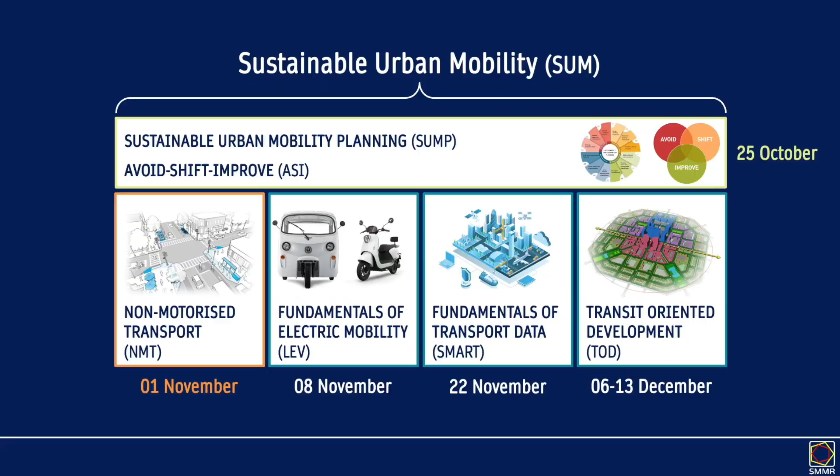On behalf of the SUM project, today we deep dive into the topic of non-motorized transport. NMT, a topic I am very passionate about. What is it? Can anyone name a kind of non-motorized transport?

Bicycle, walking, scooter, yeah. There's many clues in this picture, and it's in the name. Anything without a motor or an engine, like walking, cycling, small-wheeled transport, and that could be a skateboard, but also maybe a street vendor who has a cart that doesn't have a motor, and a wheelchair is also non-motorized, at least some types of wheelchairs.

You often see non-motorized transport referred to as active mobility or human-powered transport, but the most common is NMT and active mobility. Today we'll really focus on walking, and we'll also talk a little bit about inclusivity, which will cover wheelchair travel. We won't cover cycling in much depth, not because it's not important, but because it's another very big topic and we just won't have time. But in the future, if you're interested, we can do an extra session where we focus entirely on cycling.

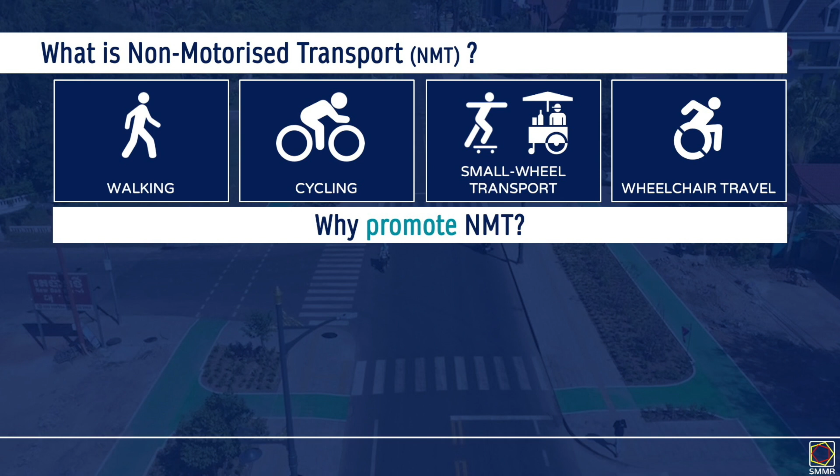Economically, if I walk to my destination instead of taking my motorbike or a tuk-tuk, I will save money. Walking is essentially free. The fuel you need is the food you eat. So there is a cost, but it's a small indirect cost.

Socially, exactly, you can meet people. It's more interactive. And if everybody is walking, then that's quite good at a societal level - there'll be stronger communities. When you walk, you don't face congestion. And again, at a larger scale, if everybody in the city is walking, you reduce the amount of people potentially driving cars, which reduces congestion, but also having a very walkable city can also increase public transport ridership.

Walking, active mobility, is great for short distances. It's not very practical for medium or long distances, but the majority of our trips are short distances. And everyone, including drivers, are pedestrians at some point in their lives or in their trip. If you own a car, you might have to walk to your car from your house, or when you arrive at your destination, you have to park your car and walk. So everyone benefits from having good walking pedestrian infrastructure, and it's also the most natural way of getting around. We are essentially born to walk, and walking is good for us, and walking is really the foundation of our transport system.

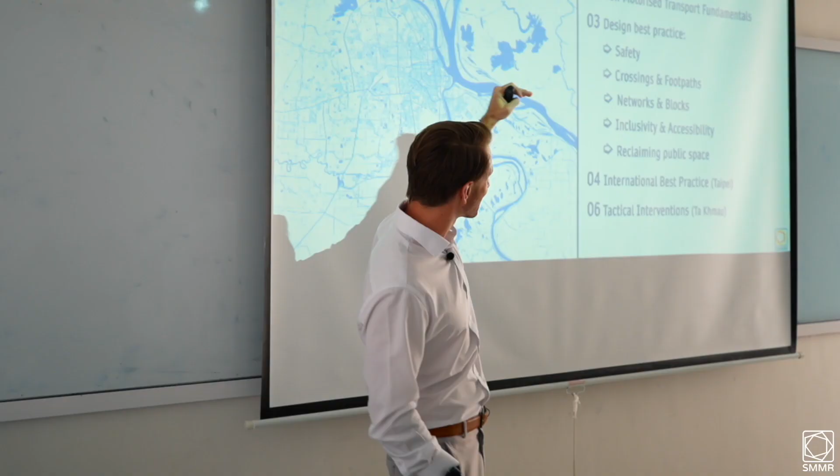Then we'll talk about the fundamentals. After that, we'll go into design best practice, and we'll cover how to make our streets safer, how to improve

our footpaths and crossings, how to create integrated networks of footpaths and crossings. Then we'll talk about inclusivity and accessibility.

Walking is something that you can probably do very comfortably, but also think of your little brother or sister. If he is 3 or 4 years old, can he walk safely?

Less likely. Or if you have a grandparent who's over 70 years old, it's also important that they can comfortably navigate the streets. Also, vulnerable users.

So people in wheelchairs, people who are blind, and there are many ways we can better design our streets for them, and not just thinking of streets as spaces for movement.

They're also public spaces, and we can create more public spaces. And I think Phnom Penh would really benefit from more public space.

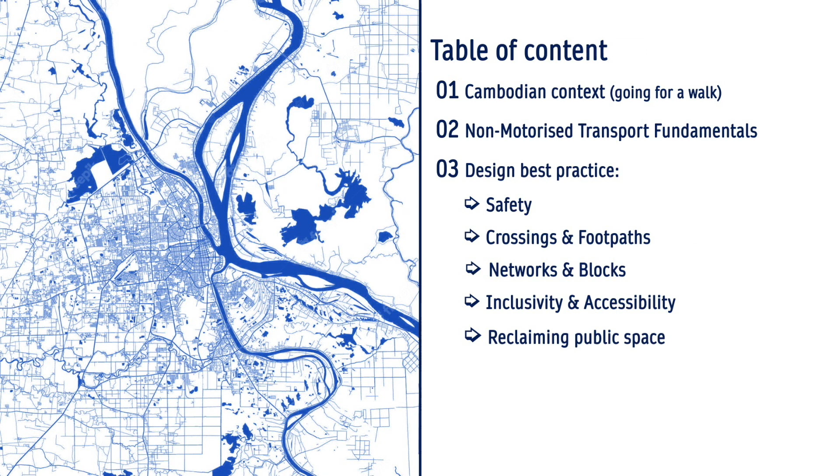Then I will talk about some international best practices. I have used Taipei, the capital of Taiwan, and I'll explain why later on.

So, Cambodian context. Yesterday morning, I went for a walk. I live around here, and I had to buy some food. So this was my walk, and I made a video.

I recorded it, and we will watch the video, and I want you to think about these different elements, and then we will score it. So it's not very scientific, but it's just to get us thinking.

Good morning everybody. I wanted to take us on a little video walk where I would document my user experience as I go from my home to Super Duper to do some grocery shopping.

It's exactly 8 a.m. on street 278. As you can see, I am walking in the middle of the road because I don't have a footpath.

Now we're going on to street 63. A lot of street life, different businesses spill out onto the road and onto the footpath, which is why I have to walk on the road next to the vehicles, which I have to say can be a little bit stressful. And that's because these businesses serve the two-wheelers.

Needless to say, every walk is exciting and interactive, but unnecessarily dangerous.

And it seems the buildings are built with wide footpaths, but these become areas for parking, and little businesses pop up on what could be somewhat continuous footpaths, and it leaves no right of way, not even 1 or 2 meters where someone can walk.

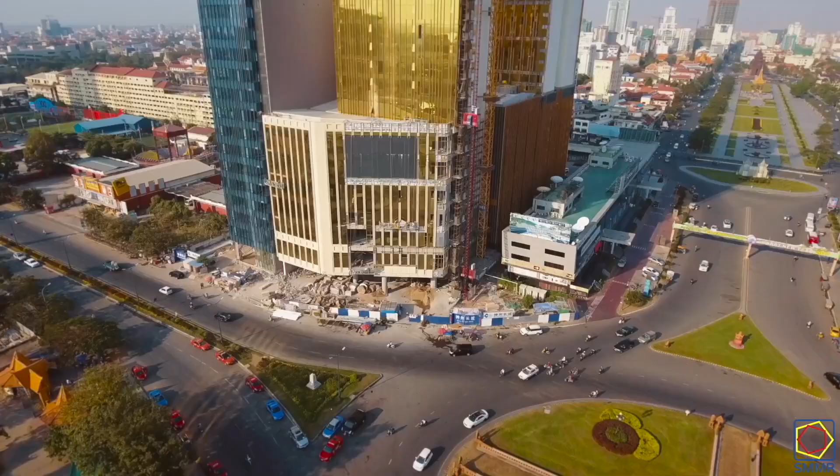of Phnom Penh, excluding a few of the more modern areas, say on Koh Pich, Diamond Island.

There, the streets have been built to different standards. There's many things we could do to improve this situation. But the first thing we need to do is understand what we are dealing with.

So, out of 5, or 0 being not safe at all, 5 being safe, how do we feel my walk was?

I will give it 1 point. Just because it didn't feel safe, but in 3 years, I've never had an accident. I feel like the vehicle flow is so obstructed in Phnom Penh that vehicles drive slow, that even though the

situation is not good, it's not super dangerous. So 1 point for safety.

How about comfort? It's true, it wasn't very comfortable, but it was possible to walk. That is something. You go to some cities in Southeast Asia, Jakarta, Bangkok, Manila, some places are impossible to walk in, but other places are quite good.

So okay, maybe 2 for comfort. Another element we have to factor is the surface I was walking on. How was that? Smooth? Not so smooth? Shade? This was in the morning, so the sun wasn't high enough, but in the daytime it gets quite hot.

There are some trees, some shade, so shade is okay. Crossings, no crossings. Inclusive - do you think this was inclusive for someone in a wheelchair? Connectivity - my ability to get from here to here and how easy that is. So it's not a really well-connected city. Parking - there is parking, but in the context of walking, parking is a big problem. It's something we really want to solve.

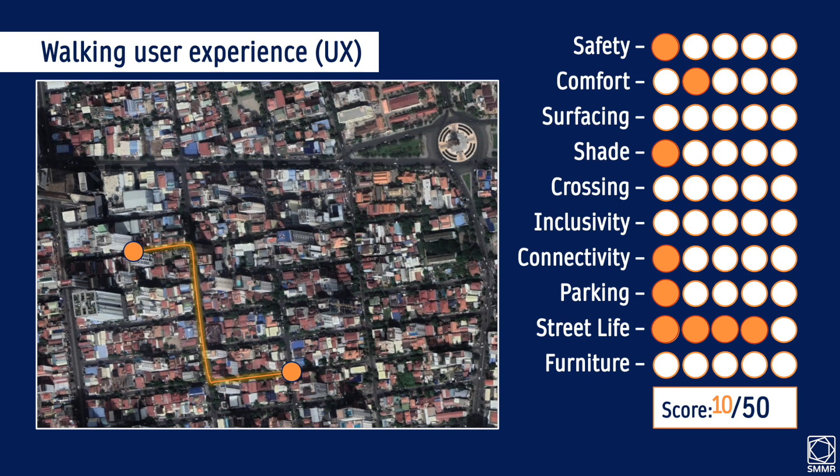And when we score it all together - I did this myself - I give it 10 out of 50. Not a very high score. But there is so much potential, and we'll explore that today, how we could potentially improve these kinds of streets and what kind of design practices we could and should explore.

The footpaths are there. They used to be well used by pedestrians in a lot of the inner city areas. A lot of this is a legacy of French urban planning. I couldn't find a year, but it's between 1940 and 1970. Most people were walking, you had some bicycles and cyclos. Cyclos were the tuk-tuk, the PassApp of the time.

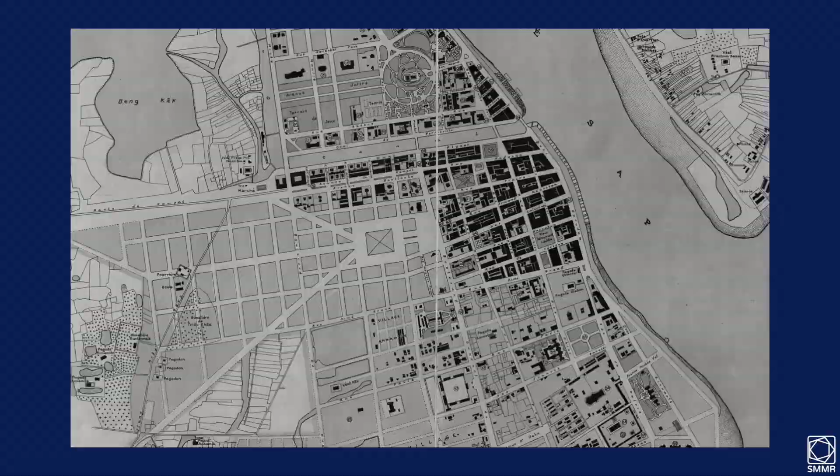The city was designed for a much smaller population, and the infrastructure was built for walking, and at the time there was no or very limited motorized transport. So Phnom Penh used to be a very sustainable city, and walking was very smooth, safe, seamless. As more and more motorbikes entered the city streets, more and more cars arrived, fewer and fewer people would walk. And so businesses had to sell to people in vehicles, and it creates a strong incentive to move your shop, move your goods right to the edge of the footpath.

And so they blocked all these footpaths that once existed because now they sell to people on motorbikes. I'm sure you do it, I do it, because of motorization, which has happened as Cambodia has grown. Last week we spoke about growth and how your job is to absorb this growth. There's been a lot of urbanization, and the urbanization has happened with motorization.

Urbanization can be healthy or unhealthy. We explored last week what that looks like, and there's many examples of healthy urbanization in Cambodian cities, but also very unhealthy. So healthy urbanization is when we limit urban expansion and we build vertically. We fit more people in a small amount of space. That's more sustainable, and that's densification.

The opposite is sprawl, where we build low-density settlements which create more private car trips. Densification is good, but it has happened in a very uncontrolled fashion. And now there's an old urban plan built for I don't know how many thousands of people, but today it's the same urban plan with much taller buildings, way more vehicles, way more people, way more shops, and it's all happening in the same amount of space. And it's created quite a chaotic streetscape.

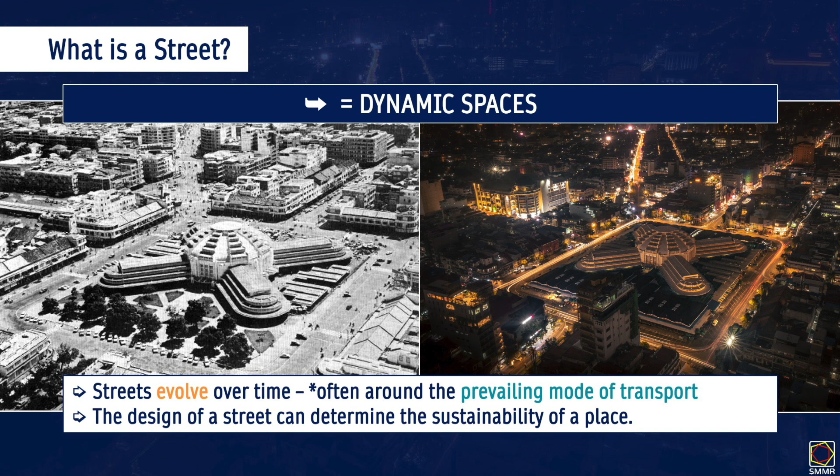And streets are also dynamic. You can see how Central Market has changed in the last 100 or maybe 70 years. There's been a lot of urban development, a lot of densification. Here we have Sorya Mall. There used to be very wide, unobstructed footpaths. Now they're mostly used by shops and for parking. There was trees. The market was expanded. The street space is dynamic. It changes over time. They often change around the prevailing mode of transport. So back then, you didn't need as much parking for vehicles, and that's what changed in 70 years.

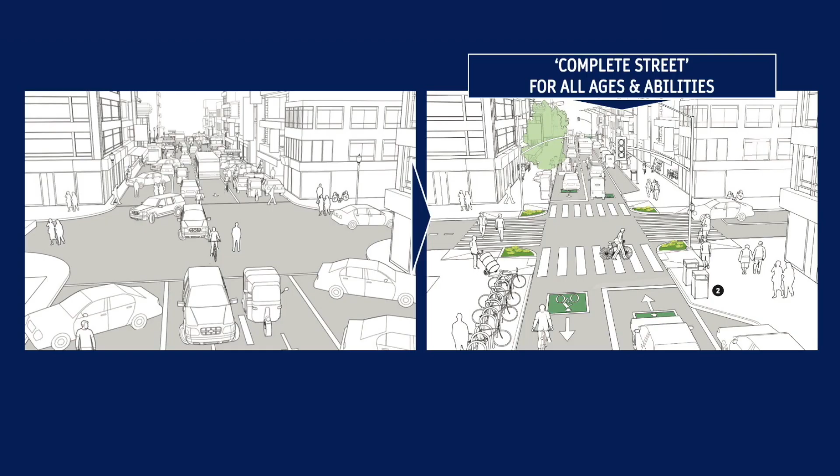This is what many of the streets look like today, and it's not optimized because it's not organized. Whereas a complete street is a street that is much more organized and is designed around all the different uses. Well, look at what we can see here. The roadway here is narrower. There are parking bays, there's green infrastructure, so we see a tree here. The pedestrians have at-grade crossings, yeah. There's small ramps, so it's level. And there's bins, and there's many different features. And that's a complete street.

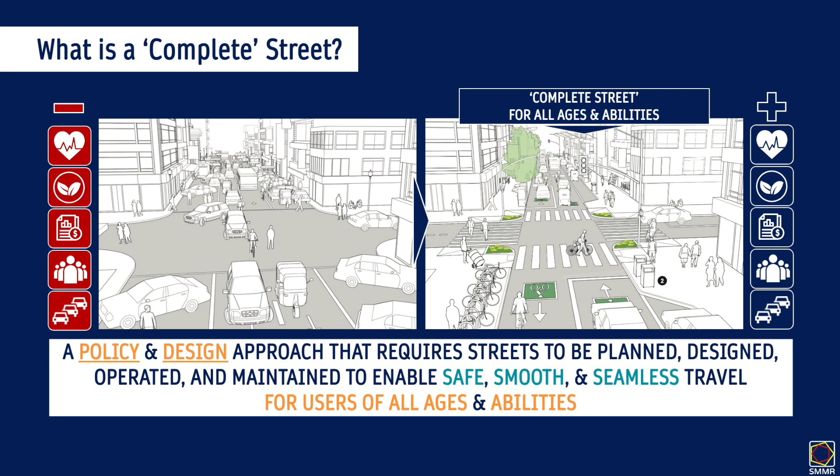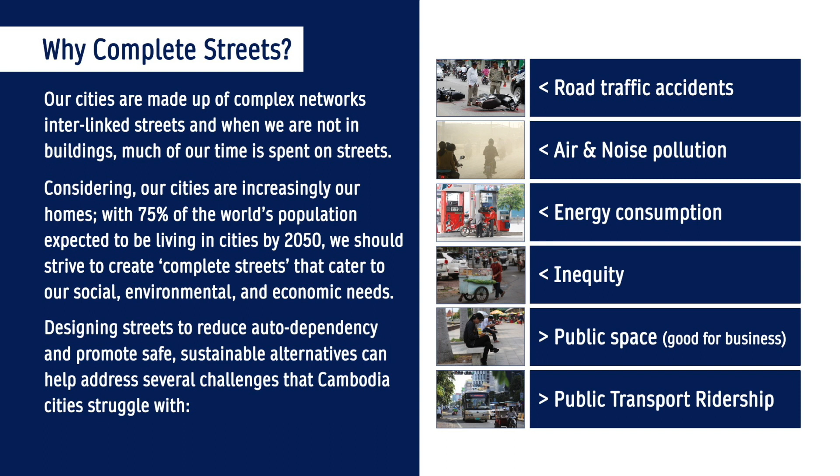And we will really look at all the different elements of a complete street. A complete street is essentially a policy and a design approach that requires streets to be planned, designed, operated, and maintained to enable smooth, safe, and seamless travel for users of all ages and abilities. And if we can create complete streets, we can reduce road traffic accidents, reduce air pollution, reduce energy consumption, reduce inequity, and increase inclusivity. We can increase public space, and we can also increase public transport ridership. So these are all things I think we can all agree are worth striving towards.

But now what we need is to know some street design best practices to make these nice thoughts a reality. We can design our streets to increase safety, and we'll look at how we can do that.

And we'll also look at how we can design footpaths and crossings to improve the non-motorized transport environment. We'll look at networks of footpaths and crossings and how that can enhance overall non-motorized transport mobility, then accessibility and public space. So first things first, safety. Safety is obviously a very relevant topic, unfortunately.

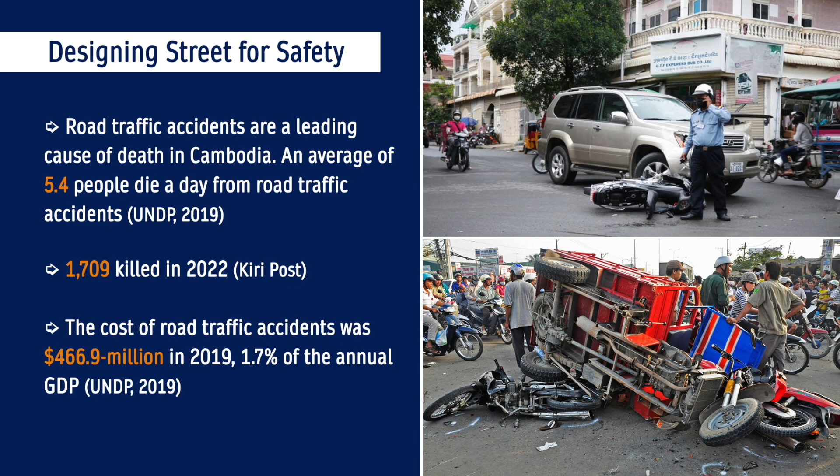In 2019, 5.4 people died a day in Cambodia in road traffic accidents. I suspect it's more now. What's most tragic is it can happen to anyone at any time, and it is completely avoidable through better driving behaviors, but design and street design can really enhance safety. And besides accidents being tragic, they're also very expensive. You can lose some valuable, young, economically productive people from road traffic accidents. The cost of road traffic accidents in 2019 was $467 million.

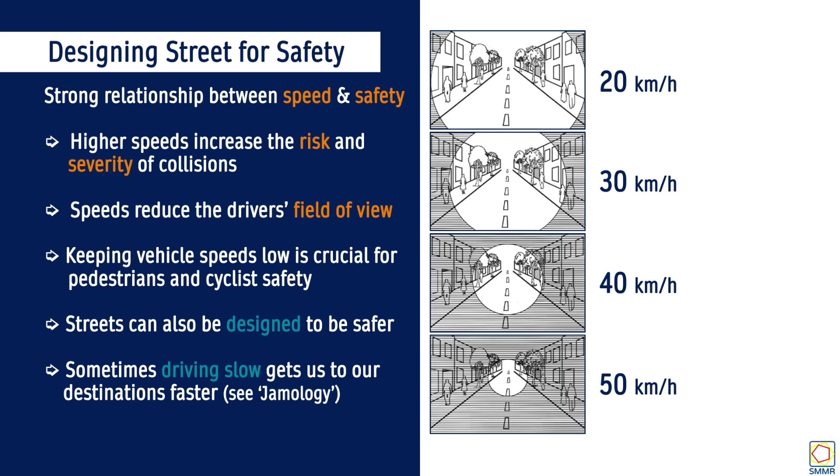And if we want to improve safety, we need to understand the relationship between speed, driving speed, and safety. The higher you drive, the more likely you are to have an accident, and the more likely that accident is going to be severe. And that's because when you go fast, you reduce your field of view. So if you drive slowly, you can process a lot more information about your surroundings. And as you go faster, you can see less and less. It becomes blurry. So if I'm driving down the street at 50 kilometers an hour, it could be something as simple as a street dog runs out. I might not see it, or I might not be able to slow down in time, and that can cause an accident.

Or if you're to hit someone, speed also is a big factor. So if you're driving 80 kilometers an hour, the risk of death is essentially 100%. 50 kilometers an hour, roughly 50%. And as you go slower and slower, the risk of pedestrian death goes down considerably. And that's in part because the faster you go, the longer it takes you to stop. So you see less, and it takes you longer to stop. And so we can have a lot of road traffic fatalities caused just by speed. And I'm suggesting that we drive slower.

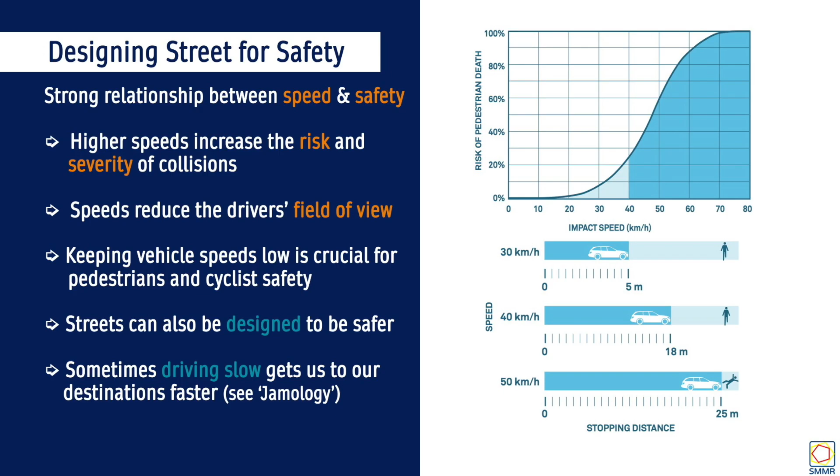And many people might think, well, I don't want to drive slower. It takes me longer to get to my destination. But if everybody is driving slower, we slow down the average speed. It can, in some instances, reduce your average journey time, because congestion is often caused by vehicles coming together. Once you stop the flow, you create waves of congestion, and it slows down movement through the network. And so sometimes driving slow can get you to your location faster. It's counterintuitive. If you're interested in that, there's a concept called Jamology that explains why driving slower is faster.

So how can we improve safety? Through design, we have different options. This general topic is referred to as traffic calming. And it's essentially calming down traffic using different street design configurations. And there's many different options. I'll give you a few examples. So one obvious one is narrowing the lane. The wider the road, the faster people tend to drive. You make it more narrow, they will drive slower. And if you narrow your lanes, you can free up space for other activities.

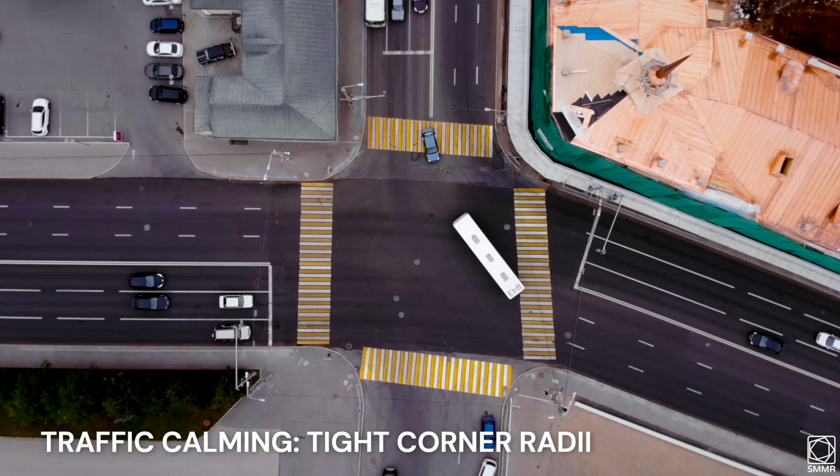That's one option. Then when it comes to intersections, the speed at which vehicles turn depends on the radius at which they can turn. And if you want to slow down a vehicle, you can create a more narrow radius. So here you can see most intersections are 3 to 5 meters, the radius, which allows you to corner reasonably fast. Some in Phnom Penh are more than 5 meters, so you can really take the corner at a very high speed, which is quite dangerous. If you really want to slow down traffic, you should opt for around 1.5 meters. So you drive towards the intersection, you really slow down, you take your turn, and then you speed up.

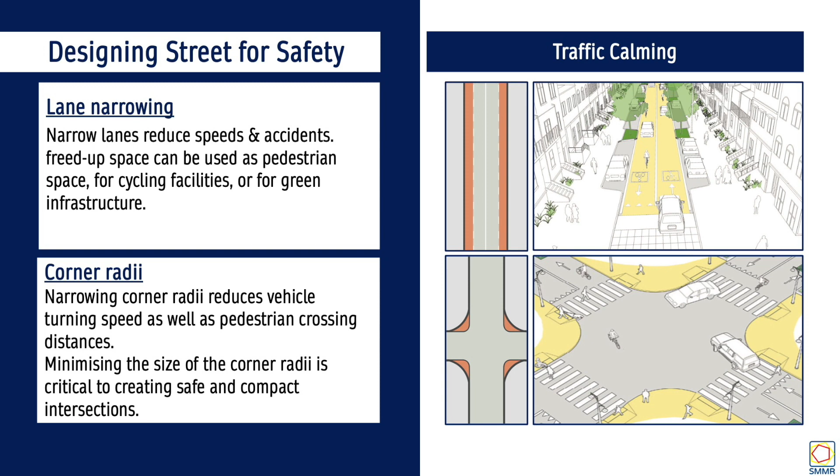That really increases safety, and it's good because if you narrow the radius, you also make the pedestrian crossing distance shorter. So cars drive slower, people walk less far, they're at less risk when they cross the street. And something as simple as that can go a long way in making your streets safer. Here's an example. This is in Addis Ababa in Ethiopia. A vehicle turning here can go very fast, and this person is quite vulnerable.

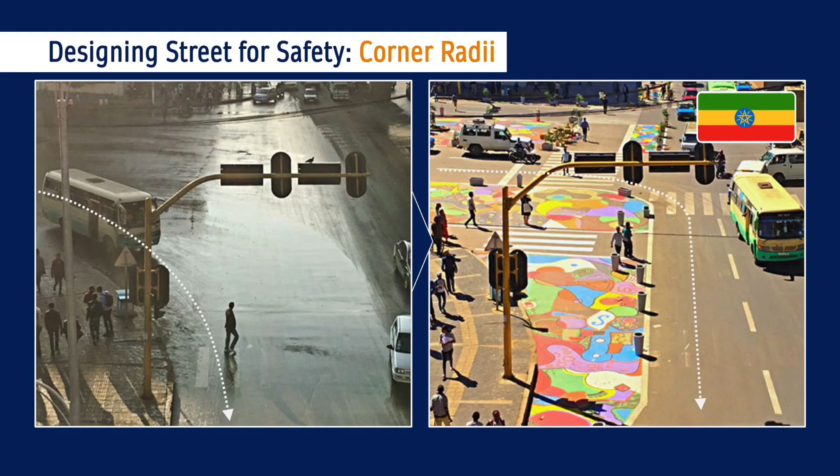So we saw that as a big problem, and using paint and plants, and we'll explore what exactly is going on here later on, using those, we made it much more narrow and slowed down the vehicle speeds and reduced this crossing distance. Another option, not at the intersection where roads meet, this is the mid-block, in the middle of a block. There's also ways you can slow down vehicles.

This is a pinch point where basically for a small segment, we create a narrower roadway. A car approaching this way or then that way will have to slow down, and it's also a good location to put in a crossing. So that's another option.

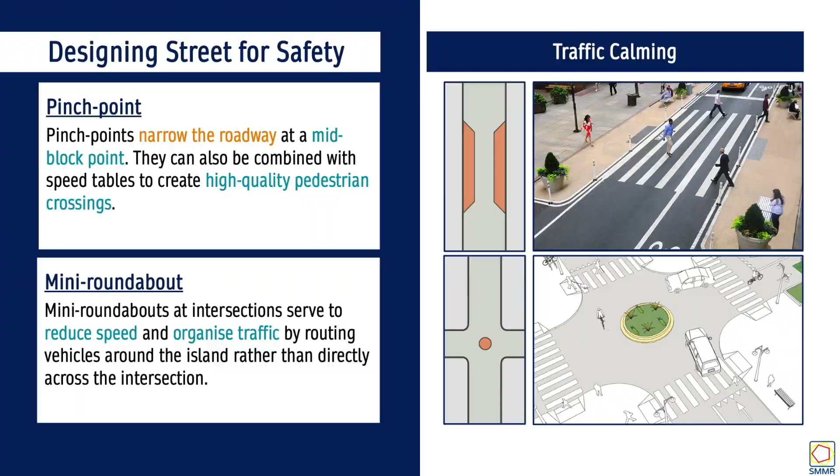We can also look at mini roundabouts. They essentially force vehicles to slow down a little bit as they enter the intersection. Instead of driving straight through the intersection very fast, you force vehicles to slow down a little bit. That can increase pedestrian safety.

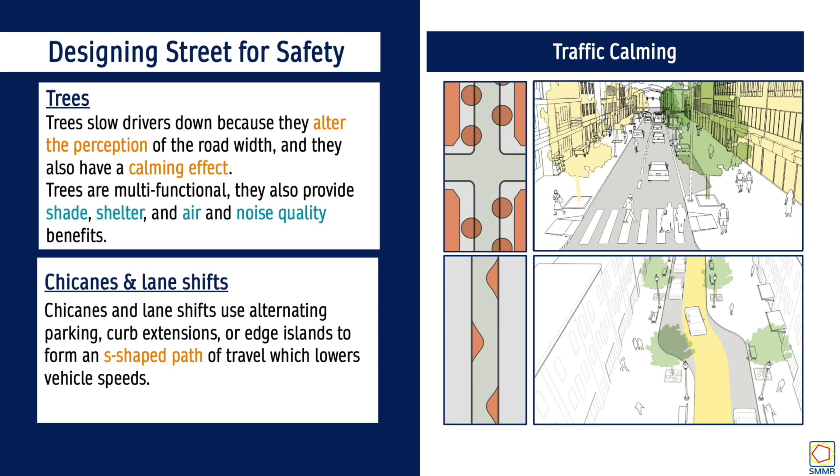Other traffic calming methods, some are less obvious. Planting trees. They alter our perception. We feel like we're in a more confined space, and we're more inclined to drive slower when we're surrounded by trees. Trees are also very calming, and trees are also good because they provide shelter, shade, and they can improve air and noise quality. This is a street in Hanoi in Vietnam. I can imagine myself driving a little bit slower down this street because of the trees.

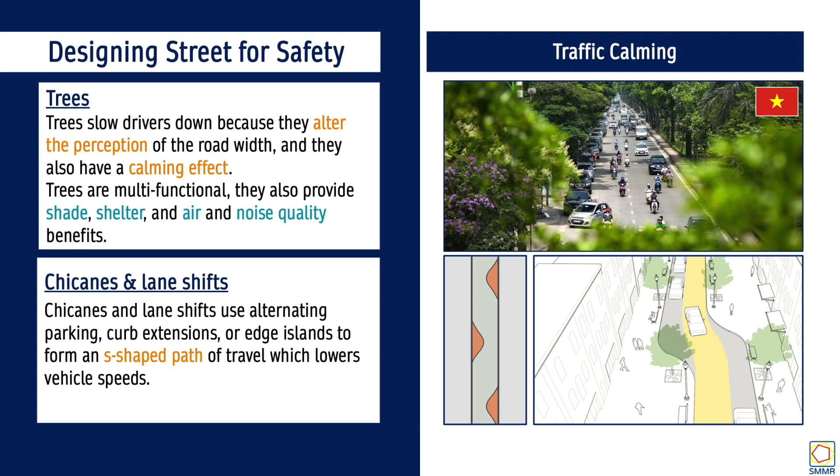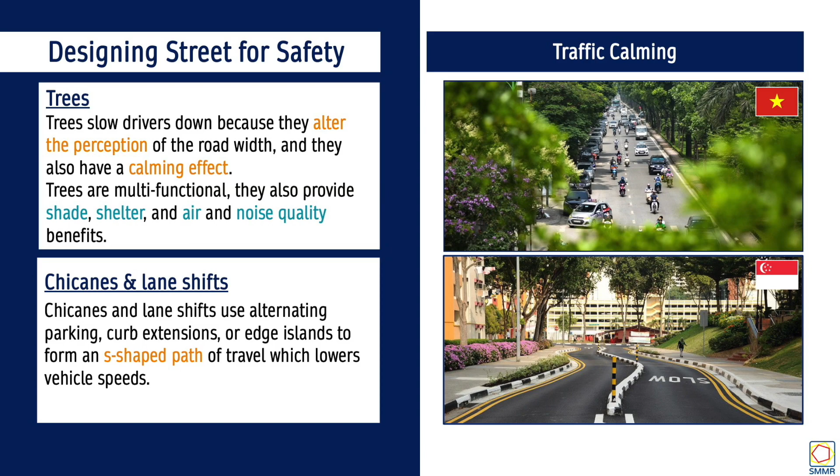Then another option, this one's a bit more unusual, is to have chicanes, basically creating S-shaped paths to force vehicles to slow down. And there's examples of this in Singapore. So that's another way to calm traffic.

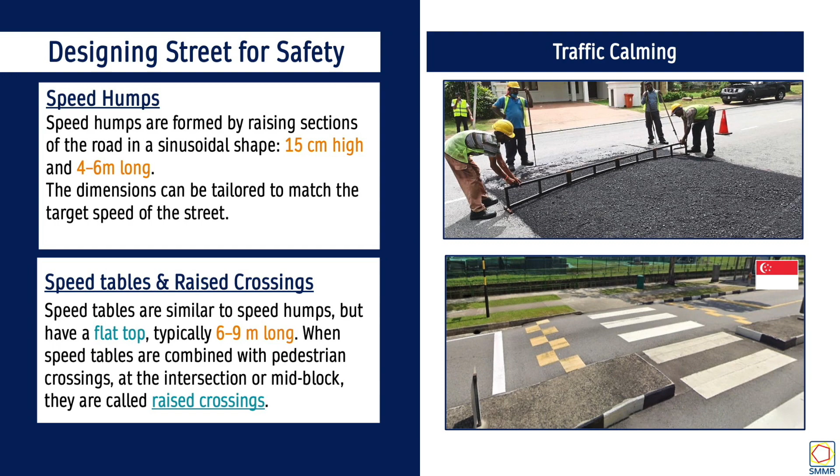So this is kind of a pinch point with a raised crossing, and you slow down vehicles, you make crossing safer. And another example from Singapore, you can see a lot of good things going on, and we'll revisit that later. So that's safety. A big component of good non-motorized transport depends on managing traffic.

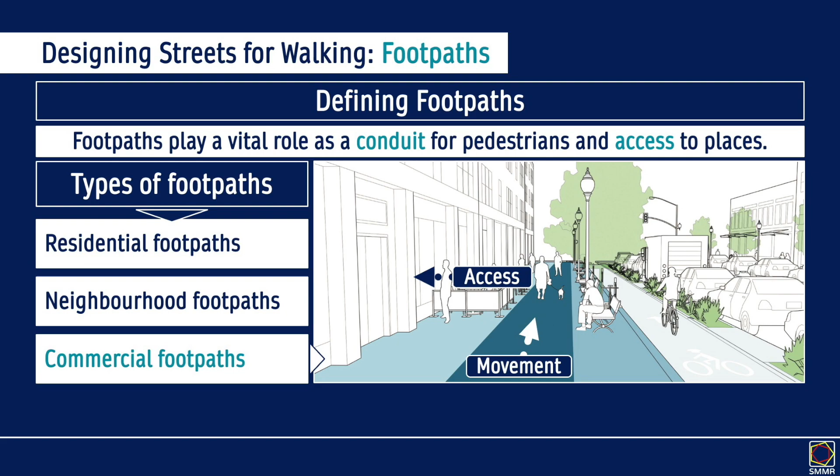And next, what we need is good footpaths. Footpaths, we know what they are just from living in cities. They are part of the streetscape next to the building edge, and they play a very important role for the movement of people, but also access to the buildings. And there's different types of footpaths. Residential areas have different needs. In neighborhoods, you have also different needs, and commercial streets like this one also have different design needs.

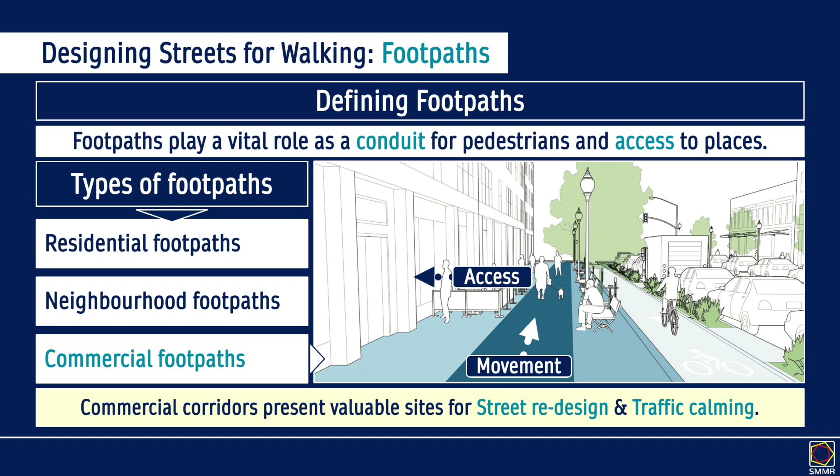And we will focus more on commercial footpaths. I think they're most interesting and relevant. And they're also spaces where there's the greatest opportunity for redesign and traffic calming. So footpaths can be broken down into different zones. And you can see them highlighted here in the different colors. You have the frontage zone. So this is the building edge here.

And this is the zone immediately in front of the building. So it could be immediately in front of the shop. Shops often have posters or plants, and that would exist in the frontage zone. Here we have some kind of restaurant or coffee shop, and it occupies part of the frontage zone. So this is not where people move. And in the Phnom Penh configuration, the frontage zone seems to be the entire footpath at the moment. So it'd be nice if we can reclaim some of that space.

The next zone is, in this case, the pedestrian zone. This is, or should be, an unobstructed path. Pedestrians should always have a right-of-way that is continuous. And so that's the pedestrian zone. In a residential street, it should be at least 1.8 meters. In a commercial area, it could be more. Really depends on the volume, but anything beyond 2.4 meters.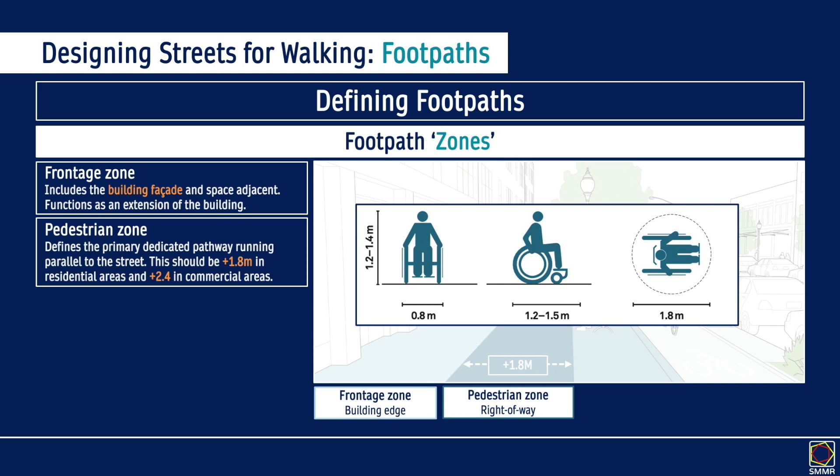And the reason in part is for accessible mobility. Say you want your pedestrian right-of-way to be wide enough for 2 wheelchairs to go past each other, or 1 wheelchair to be able to comfortably turn around. And so you need to maintain a clear right-of-way of 1.8 onwards.

Then you can have a furniture zone. In a busy commercial street, people will maybe want to sit. So you should provide benches. Some benches should be in the sun, some should be in the shade. Sometimes first thing in the morning, you want to sit and enjoy some sunshine. And so you should have a mix.

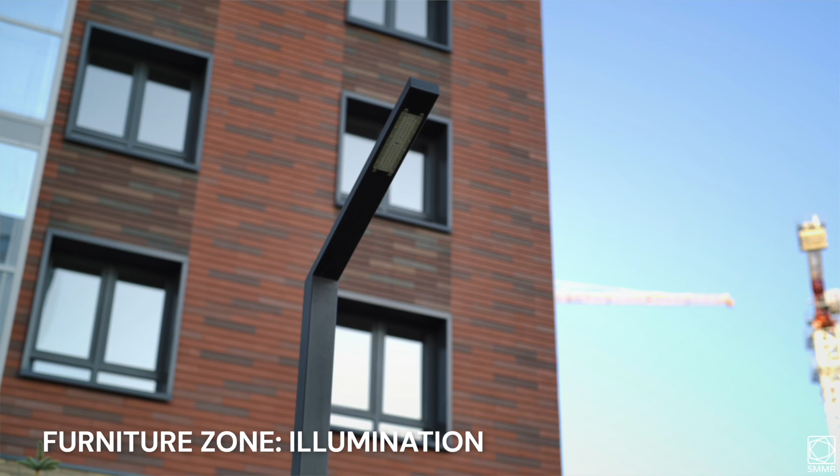You also need lights. Lights, they improve safety. At nighttime, a well-illuminated street has less crime, generally. But also, if you include more lights, there will be more people. If there are more people, there's more potential business with the shops. And so by providing good illumination, you can extend the hours of business, and good business is good for the economy. So that happens in the furniture zone.

Here you can also have bins. You could have your utilities. You often need telecommunication boxes or access to the drainage pipes.

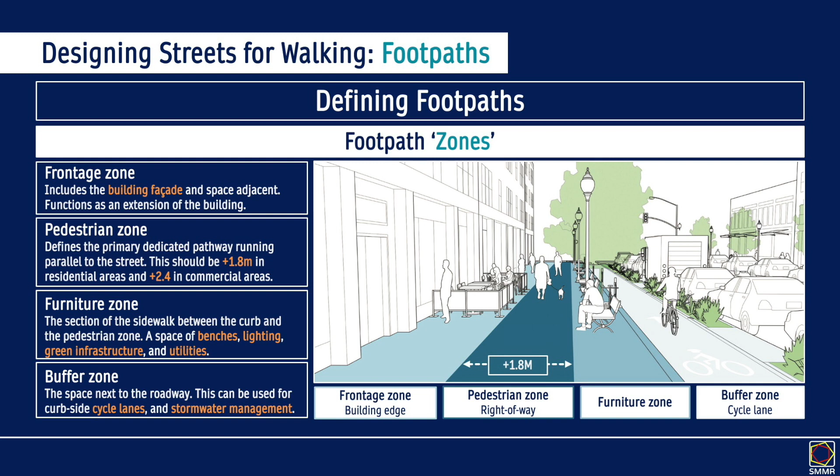So this could be located somewhere in the furniture zone. And then you have a buffer zone, so the space next to the curb. In this case, we have enough space for a bicycle path, so there's a bicycle path here. There's also some green infrastructure. This can be good for absorbing rainwater, for example, and separating people from the roadway.

And there's also different elements. So here we have one element that's active frontages. We should, in a commercial street, design the ground floors to be attractive, and that's a good thing. If you have shops with nice windows showing their products, it creates a nicer streetscape, and if it's nicer, there will be more people, there will be more business. Again, lighting is good, prolongs business hours.

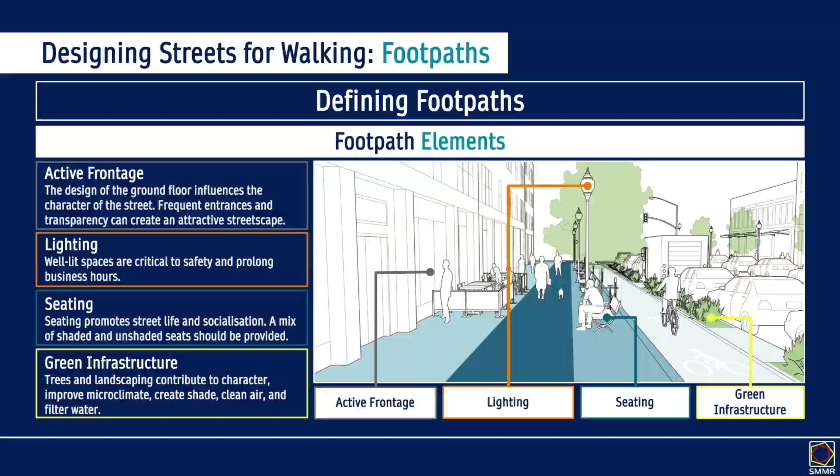Seating in the street furniture zone, and also green infrastructure, which could be in the form of trees that creates shade. It can absorb rainwater, it cleans the air, and has many different benefits. And when we're also considering planting trees, you can give thought to different types of trees. Generally, palm trees are not good for providing shade, so avoid palm trees if your objective is shade, while you have different types of trees that can provide much better shade or protection from the wind and the rain.

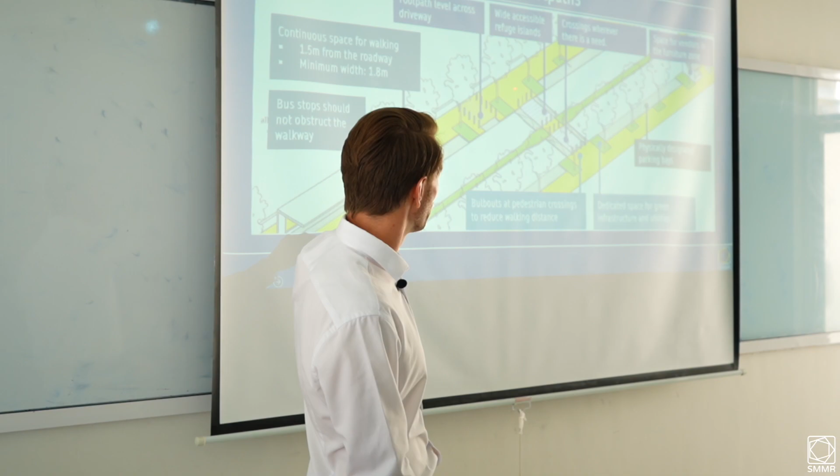In the middle here, we'll revisit this. There's also a refuge island. If there's many cars driving, sometimes you don't want to cross from here to there in one go, and it's good to take a break here. So when it's clear, you walk here, you wait until it's clear here, then you cross again. That's called a refuge island, where you take refuge, you find safety.

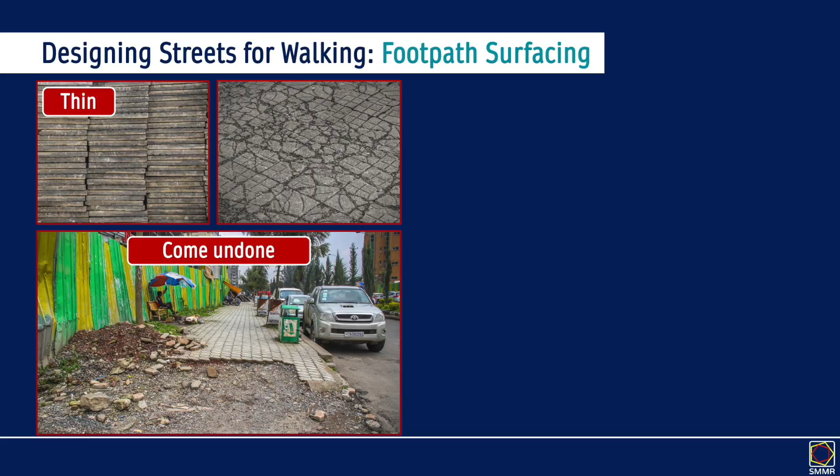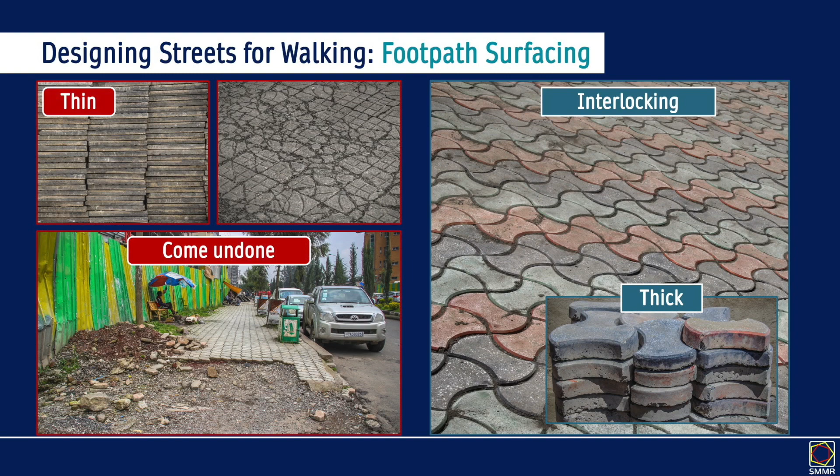Another element of a footpath is the surfacing. This was in Ethiopia. They used very thin pavings, and thin pavings are cheaper, but they break. So after 2 or 3 years, these were very prone to break. Then they switched to smaller paving stones that were thicker, but they didn't hold well together. And this was in 2017. If they didn't fix it, I'm sure the street is maybe up to here now. So a better option is to use thick blocks, pavings, and have them interlocking. So these are just small things to think about to provide a smooth surface for different non-motorized modes of transport.

So those are footpaths. Next up, we have crossings. So when you're not on the footpath, chances are you're crossing a street when you enter mixed traffic, and for that, you need pedestrian crossings. You should provide pedestrian crossings wherever there is a need, a concentrated need for people to cross. So generally at intersections, or at all intersections, you should have a crossing. Sometimes you should have a mid-block crossing if there is a demand. And there's often demands around bus stops. So if there was a bus stop here, good to have a crossing here.

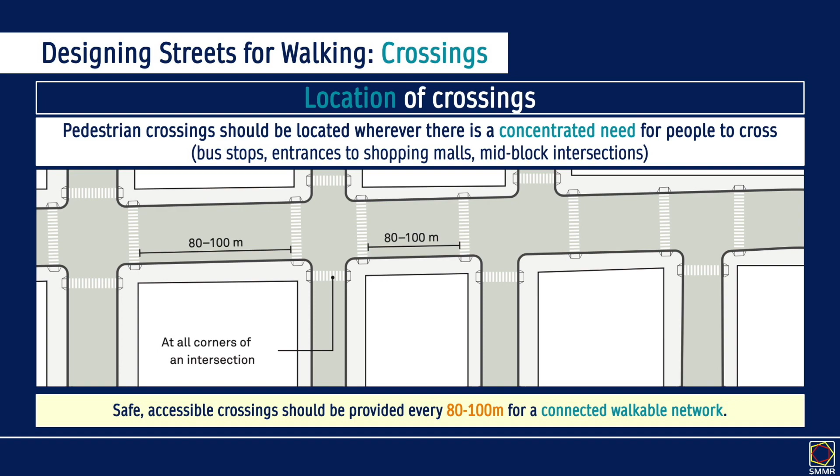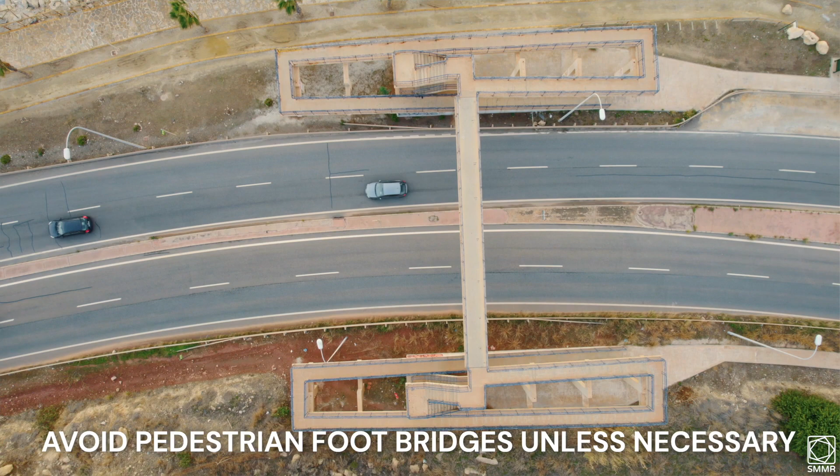There's some green infrastructure. So that's elements of a good crossing. What we often look to as a solution in emerging cities is these pedestrian elevated walkways. I'm not a big fan. Phnom Penh is building lots and lots of them. Have you seen them? I'm sure you've seen them. Have you used them? Some people do, but a lot of people, they still just cross and climb over this.

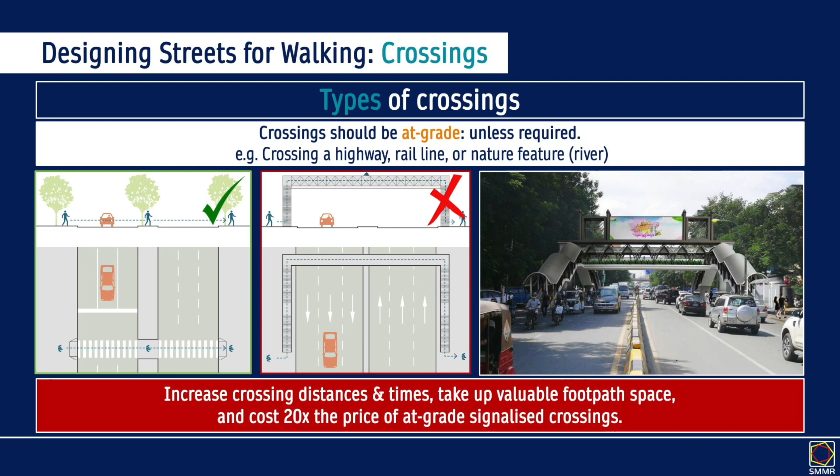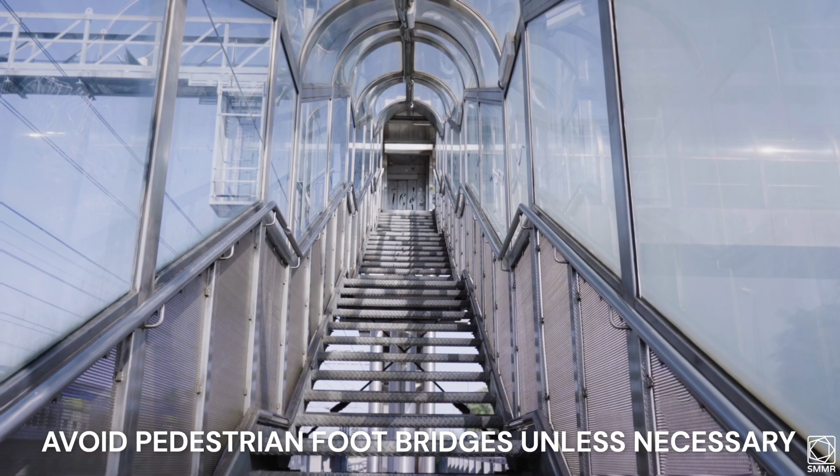It's just a really expensive solution that people often don't end up using because it's quite a journey to go over them. You have to climb upstairs, walk across, climb down, and oftentimes, even me, I just choose to cross anywhere and climb over the median, the barrier here. From an engineering point of view, yes, it's kind of a solution, but in reality, a lot of people just don't use them. It might just be better to create a proper crossing and find better ways to manage traffic and maintain traffic flow.

Another type of crossing at an intersection, we have conventional crossings. This is a very standard crossing. Here we have an example. Your crossing should align with your pedestrian right-of-way. It's at grade, which means it's at level with the road. There's a small ramp here, and you can see those here. So it's accessible by wheelchair. So this is a good conventional intersection.

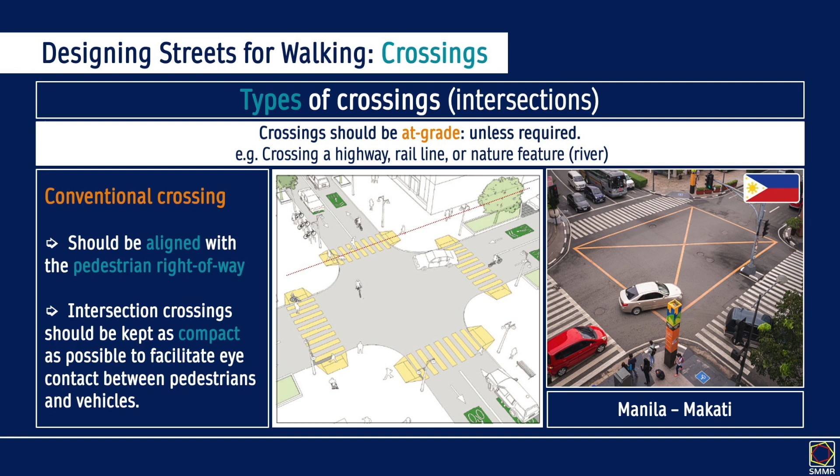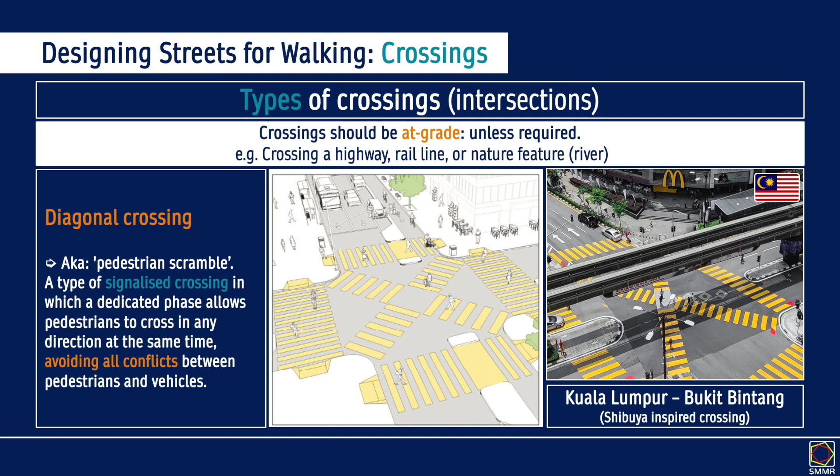This is more elaborate. This is a diagonal crossing, sometimes known as a pedestrian scramble. Here we have an example in Kuala Lumpur, and it's inspired by Shibuya. I don't know if you've ever heard of Shibuya in Tokyo. It's basically a crossing that you could introduce if there's very high pedestrian volumes. So here, there's McDonald's, there's a shopping street, there's a market, there's restaurants here, very busy area. And the way this crossing works is you have a phase where no vehicles are here. All the lights are red and all the pedestrians just spill into this space. It's quite fascinating to watch.

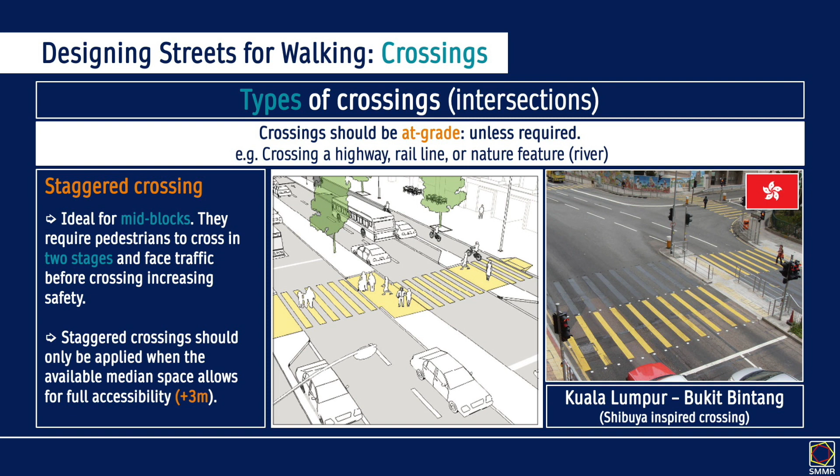At mid-blocks, so not at intersections, here's another option. This is a staggered crossing. Staggered means it's off alignment. Basically, it forces you to cross in 2 stages. You walk from here, stage 1, you arrive here on the refuge island. You have to turn, and when you turn, you face traffic. So you see vehicles coming towards you, and then you can do your second stage. So it's a safe way to cross a busy street. So this is in Hong Kong. This is an intersection, which is quite unusual, but you can really see how you would cross this in 2 stages, and they've included barriers to sort of guide you.

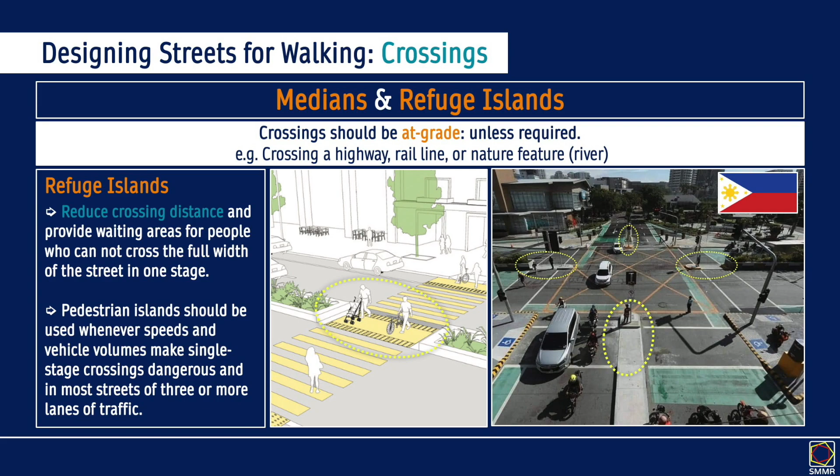And we mentioned refuge islands. Again, these are great because you can cross in several stages. Any street that has 3 or more lanes on either side should have a refuge island. These refuge islands can be designed with different features. This one is protected by this curb with vegetation. You could also have bollards, so metal poles essentially, to provide a bit more protection. This is similar. This is a tip at the median that's protruding, so it provides you with a safer space when you're here. And again, a very similar example where they've basically cut through the median to create a crossing.

And so we looked at footpaths and crossings. Now we need to think about how we can link everything together at a larger scale. When we want to create cities that promote non-motorized mobility, we need to create interconnected networks of footpaths and crossings at quite a large scale. So we have to look at networks and blocks. And when I say blocks, a block is the space within the street pattern of a city that is subdivided into land lots for buildings.

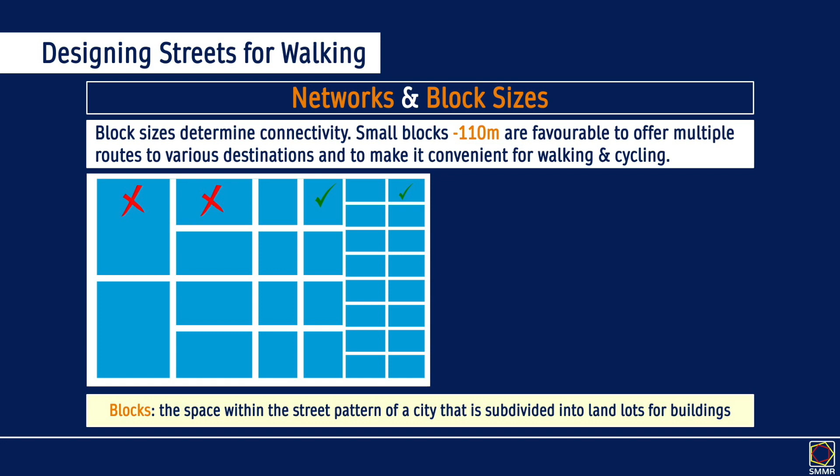In Phnom Penh, you have blocks of different sizes. You have larger blocks, smaller blocks, and if you want to create a well interconnected network of roads, be it for walking, even motorbikes, the smaller the block, the better. But obviously by motorbike, you move faster, so a bigger block is less of an issue. But if you're walking, around 110 meters is favorable. So if this is 110 meters and I want to go here, I can take lots of different routes, which is good.

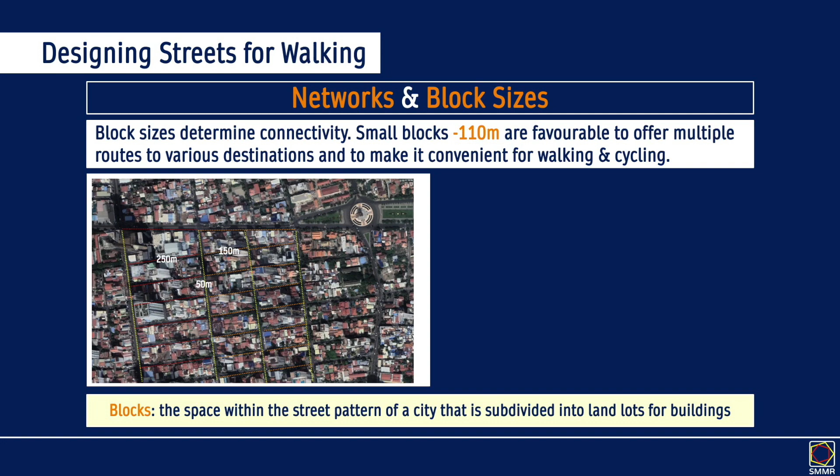When we look at it in the context of Phnom Penh, so again, my morning walk was from here to there, and the blocks here are 250 meters. So it's quite a big block, and 50 meters here, 150 meters here. It's really quite okay. If I could walk comfortably, if I had a continuous footpath, this would be a great place to walk and shop and live and socialize. Unfortunately, because the footpaths are so obstructed, walking here is very inefficient.

Sometimes you have very large blocks and you want to enhance the connectivity, and for that there's also interesting solutions. In Phnom Penh, in the last few years there's been so much development. These blocks have a lot of small houses, and a lot of them are being knocked down and replaced with big towers, big developments, malls in some cases. Whenever you build a big mall, maybe there's an opportunity to create a passageway through the mall from one side of the block to the other.

You see these often in Japan. They're called arcades, where you build essentially a passageway. In this case it's a very busy shopping street through a building, and you can use it if you want to go shopping, or if you just want to get to the other street.

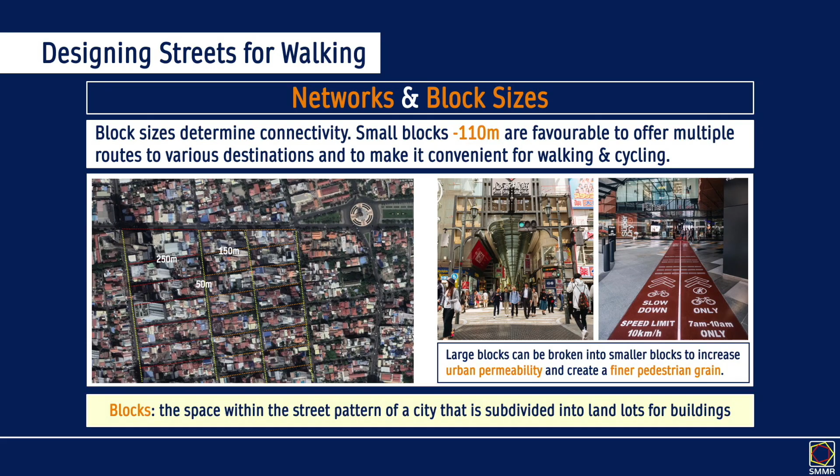This example is in Singapore. There's a shopping mall, and inside it there's a bicycle lane that you can only use from 7 a.m. to 10 a.m. when it's not too busy, and it helps you cut through a block and can reduce your travel time. When you do that, you increase what we call urban permeability. It's basically how easily you can move from one point to another and how many options you have to do it. The more options you have, generally the better.

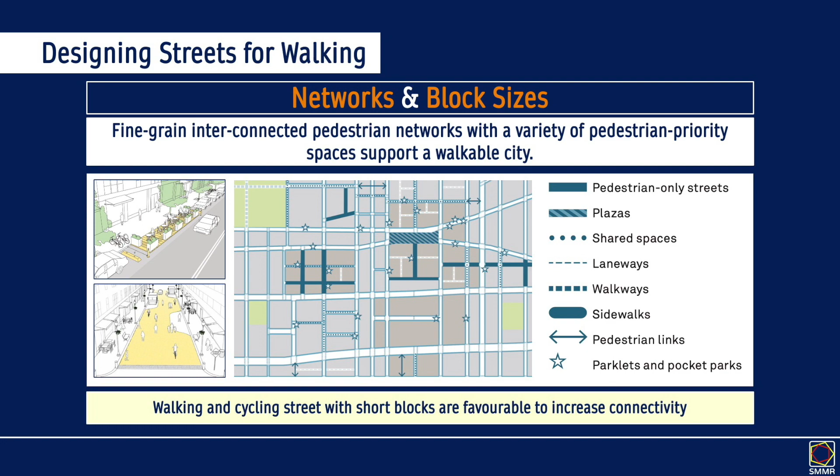This is what a good network of streets could look like, where you have good footpaths and crossings, but you might have some streets that are only for pedestrians, which might be good if you're trying to walk somewhere and want to be away from vehicles. You can also have plazas, and this is what your network could really look like: a mix of spaces that help you move comfortably, but also spaces where you can stop and relax and meet friends and go for coffee.

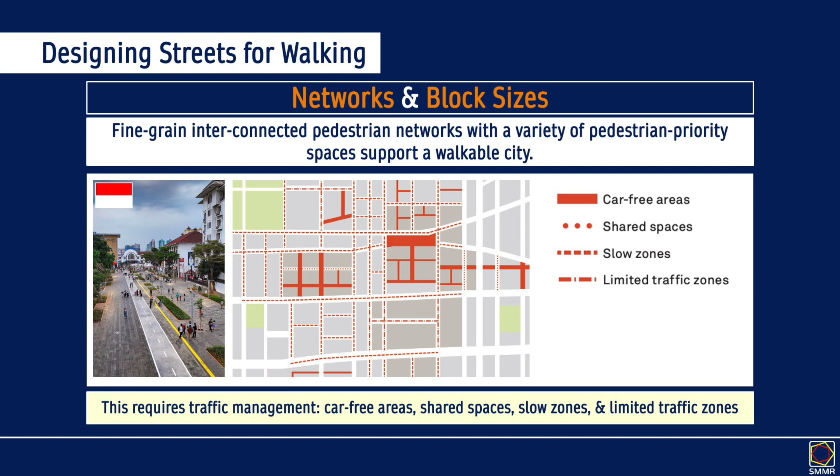And to do that, you also need to better manage traffic. It's great to have all this walking infrastructure, but it's a balanced approach. You also have to think of vehicles, because you'll have to restrict them and give some thought to how and where they can drive, and you might have to create slow driving zones.

A nice case study for this is Kota Tua in Jakarta, the old center of Jakarta. This area, in the last few years, they've turned into a low emission zone. This used to be a very busy car street. Now you have a very wide pedestrian walkway, and it's very busy. It's a touristy area. Away from this main area, the streets also have new cycle paths, which are very nice.

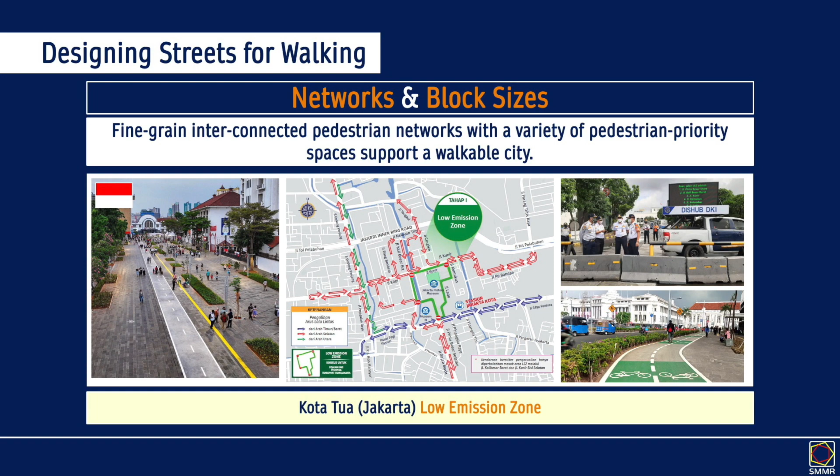You have blocked streets, and they've restricted the way vehicles can drive. Some streets are closed, some are now one direction, and they've essentially created a low emission zone in this very popular touristy area. Maybe there's ideas that could be explored in Phnom Penh.

We spoke a lot about accessibility and inclusivity. So when we are designing city streets, we should try to cater to the most vulnerable users. If you design your city around someone in a wheelchair, then everyone more or less will benefit. So design around the most vulnerable users and you will create a very good streetscape for everybody.

We saw how we can have ramps leading to the street. They should be included everywhere at all the crossings, and the ramps should have, say, a 10% gradient. They should be a certain width, etc.

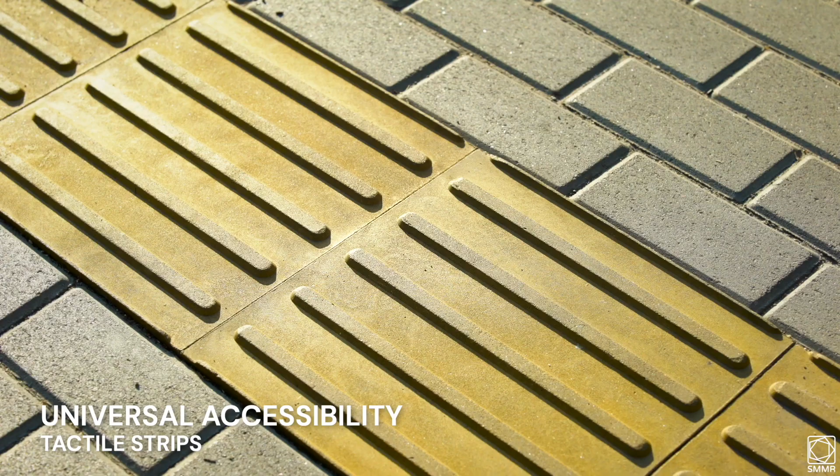Then another impairment that's common is visual impairments. You have people who are partially or completely blind. For them to navigate streets independently, there are elements and methods to help guide them, and you do see these in Phnom Penh. But if they're not continuous, they're very hard to use. They're essentially called tactile strips, and they communicate to visually impaired people when they can go and where they should stop, and they really help navigate the streets.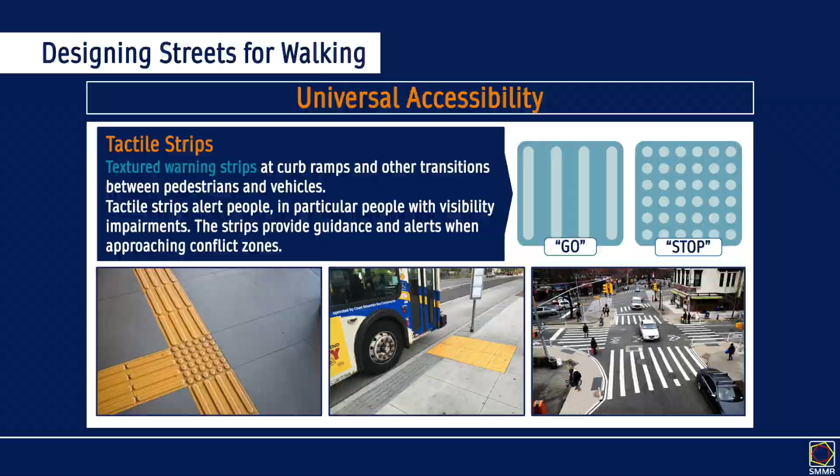So universal accessibility is something very important and should be used to help people move through streets, but also access public transport. This again is the Trans-Jakarta BRT that we saw last week, and this is where the car-free day happens. This is where they move a significant number of people through the city, and it's also accessible for people in wheelchairs and blind people.

Here you have a 10% gradient. Might be a bit tight here, but it looks manageable, which can give them access to the elevators. Access to the station is also on a not very steep ramp, and you can see the tactile strips at different locations.

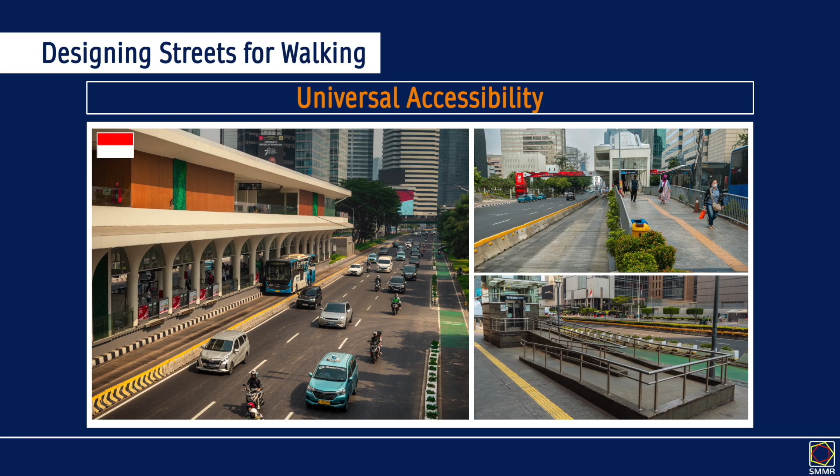And then very lastly, we spoke mostly about how we can move through space, but sometimes you don't want to move. Sometimes you want to take a break. You want to sit, read a book, meet a friend, have a meeting, not in the office space.

And for that, you probably want to be in an enjoyable public space. There are different ways we can reclaim space. One option is creating public plazas.

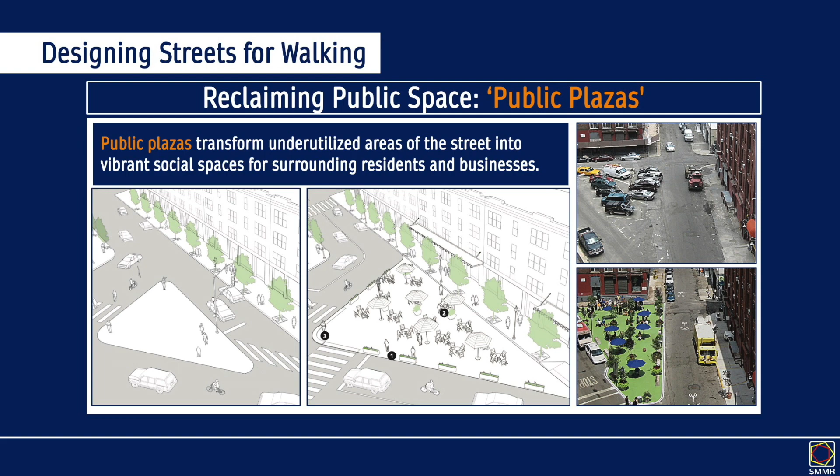In many cities, there are unused islands. Here there's some kind of traffic island, and in this example, they've closed it off to traffic and created a new public space, a little park where you can go, sit, go for coffee, sit in the shade. If you live here, this is a nice place to be able to go. If you don't have a balcony in your apartment, you come, you hang out, you have a good time.

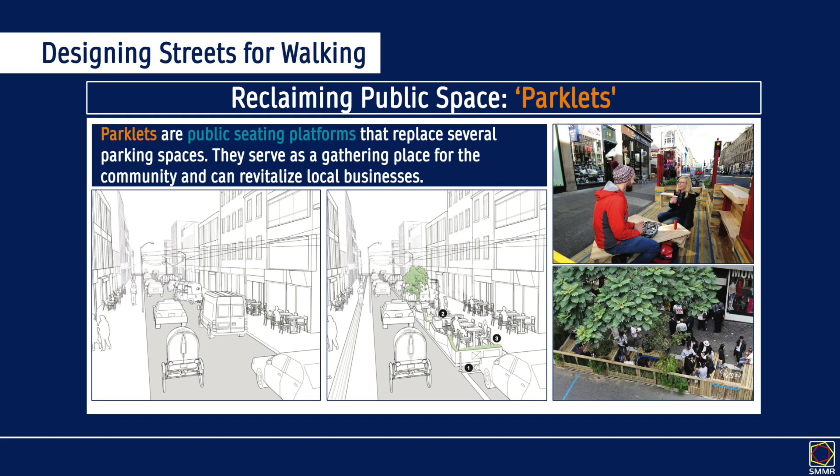Another option that could be explored, again as part of a parking management strategy, is parklets. A parklet is essentially a public space that is roughly the size of 2 or 3 parking spaces. So this is maybe the street before we did a parking management strategy, and here, without taking up much space, we can create a nice public space where people can go and have their coffee and play chess, do whatever they want to do. Very simple and very effective.

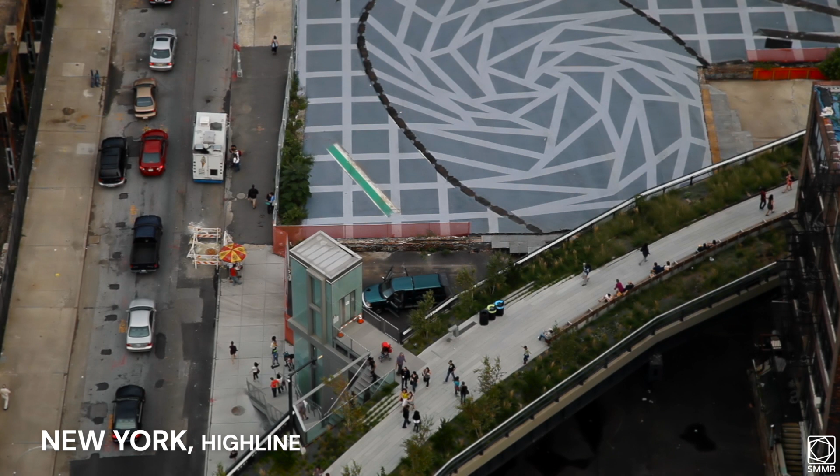Then there are some more radical ways we can reclaim public space, and there are some excellent case studies out there. This is the New York High Line. Back in the 90s, this was a railway line that was no longer used. Trains used to move along here. In 1999, the city said, we will destroy it, trains don't use this anymore.

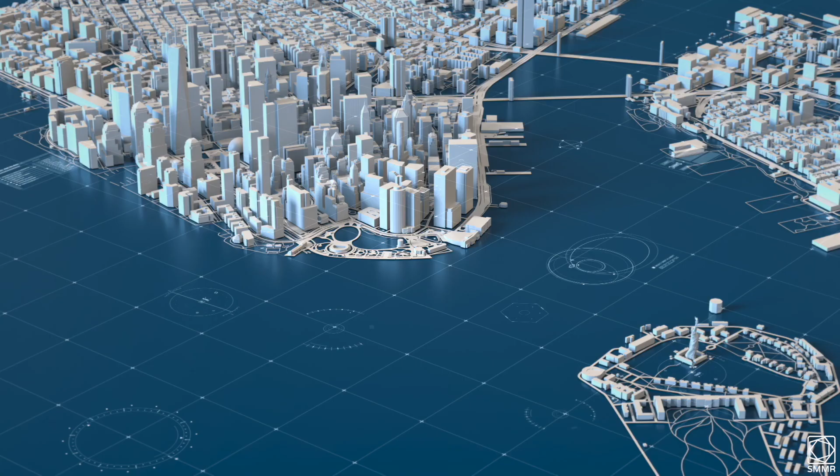Local residents got together with architects and created an idea for a public park in the sky, and the idea gained a lot of momentum. The city wasn't sure, obviously it's expensive to retrofit an old railway line into a public park, but they convinced them, and it's 2.4 kilometers long, provides a passageway through Western Manhattan, and you can exit at different locations.

You might think, this is nice, but it's expensive. But you build this, it's extremely popular, nice to look at, it's a pleasant space, and because of it land values around it have gone up. People have to pay more rent. More rent means more tax income for the government, and tax income can be used to cross-subsidize and finance projects like this. So you build something nice, and it pays for itself.

This project has inspired many projects around the world. In Seoul, South Korea, you can see a similar project. This used to be a highway, part of an elevated interchange, and you can see that this was used by cars once upon a time. They created a beautiful urban park. I made a little video documenting this place.

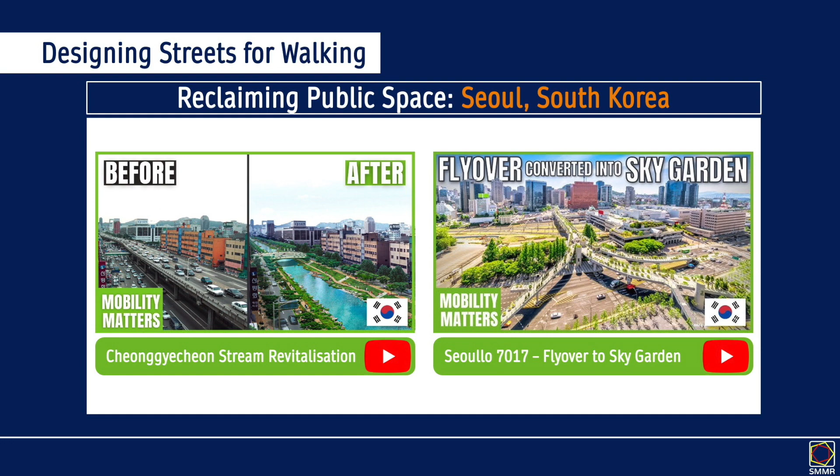Another very famous example is Cheonggyecheon. A very long time ago, it used to be a stream. They built a big highway on it. They were able to close the highway and create a new beautiful public space. Again, it's a similar story: this was a horrible place to live, now it's become a very attractive place to live. Land values have gone up, and it helps to cross-subsidize these nice projects.

If you have time, or for your homework, you can check out these videos. They provide really nice case studies, and I'm sure ideas can come up for things we could do in Phnom Penh.

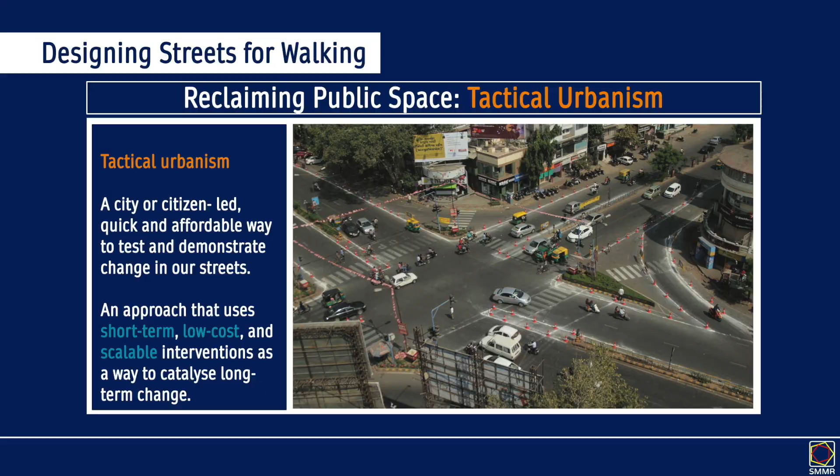Another way to reclaim public space is through tactical urbanism. It's essentially a city or citizen-led approach to test and demonstrate changes in our street. You can see here, using chalk and cones, they have reconfigured this intersection to test out what it could be like with more public space and tighter radii to slow down vehicles. Very low cost, very simple. This is something we are looking at in Phnom Penh.

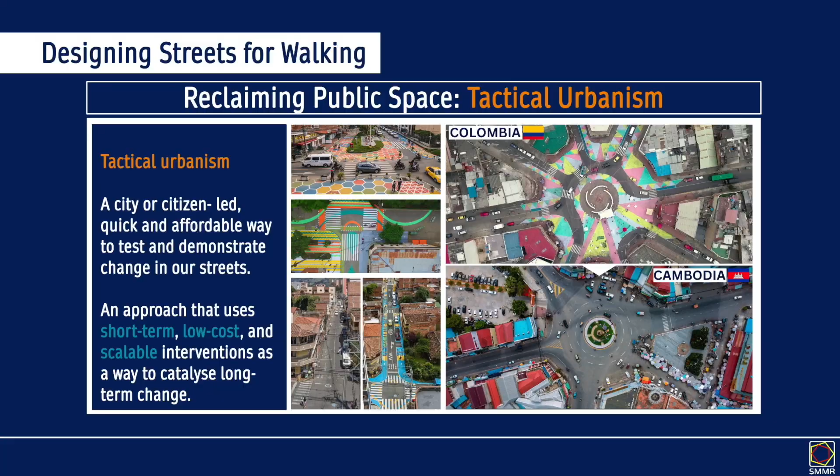So for street design best practices, we looked at safety, footpaths, crossings, networks, accessibility, and public space. We only covered a tiny fraction of what we could have covered. This is a huge topic.

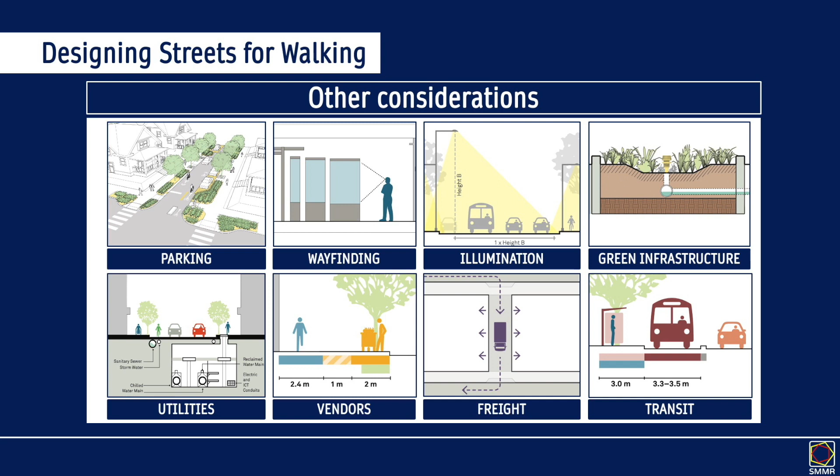We didn't talk about parking. We didn't talk about signs and wayfinding, lighting, green infrastructure, how we can integrate utilities, because it's great if you make a nice footpath, but if a week later someone comes and digs up the street to fix the waterworks, that's problematic. There are good ways to manage utilities. We didn't talk so much about vendors, but there are ways we can integrate them nicely. Freight and transit. So these are all the things we didn't talk about, which we could have talked about and can talk about in the future, just because it's very relevant to Cambodia.

There are many street vendors. Their daily life depends on them being able to sell on the streets. Oftentimes when we plan and design our streets, we don't factor them into our plans because it's common that governments don't want them to exist. Often they don't pay tax.

So it's better to find ways to integrate street vendors than to eradicate them, because their lives depend on this. One very simple method is to manage carefully where they can locate and where they can't. In Chennai, India, they use paint, and vendors are not allowed to spill out into the pedestrian right-of-way. That's something very easy to introduce.

You do need a policeman to move up and down and enforce it, but very quickly you could reclaim space. Or something more complex and longer term is integrating them into a hawker center. In Singapore, there are many hawker centers, spaces created for what used to be street vendors. Now they've brought them together into centers, not eradicated them but integrated them, and it's become a cultural phenomenon where many people go for more affordable food.

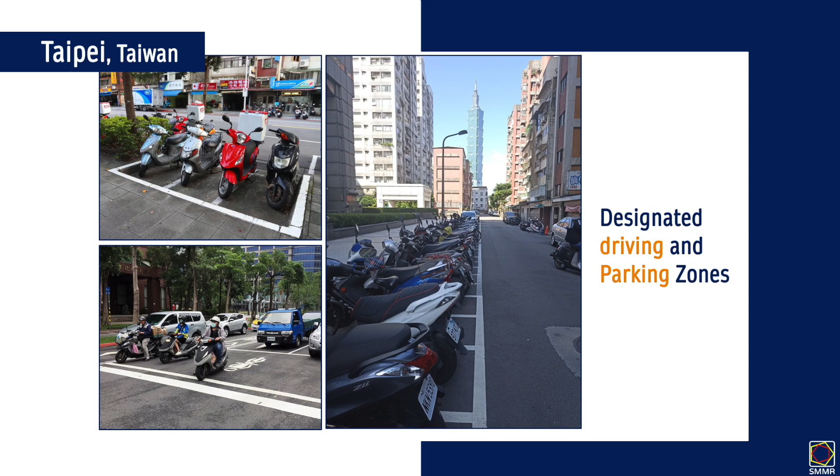But what they've done in Taipei is integrate motorbikes really well with mass transit. You can park your bike in many designated areas and interchange onto buses, onto the BRT, onto the metro, and these mass transit options are great for medium to long distance trips. So it's very normal to have your motorbike and also use public transport. Having so many motorbikes could be problematic, but they really enforce where and how you can park using paint, creating quite an organized streetscape.

You can see the pedestrian right-of-way is still kept clear, and you're still parking many, many motorbikes. This could absolutely work in Phnom Penh. Also, when you're in motion on the motorbikes, intersections have a motorbike box where you can idle and wait for the light to turn green. They've designed the streets to cater for motorbikes, not get rid of them, which is the approach in many ASEAN cities. Then in the back streets, you have a lot of shared streets like this, with pedestrian footpaths.

I don't know if I'm a big fan of this—I haven't spent enough time in Taipei to know if I like it. But without spending much money, just using paint, they've sort of organized their streets, and it seems to work quite well. You're not allowed to park here, so no vehicles are parked, and it maintains a clear right-of-way for pedestrians and vehicles.

They also have many car-free streets and really high-quality cycling infrastructure. The problem with many cities is we expect you to use public transport, and you will drive to public transport with your motorbike. But then when you take public transport to your destination, you don't have a way to get to your final destination, which means you don't take public transport in the first place.

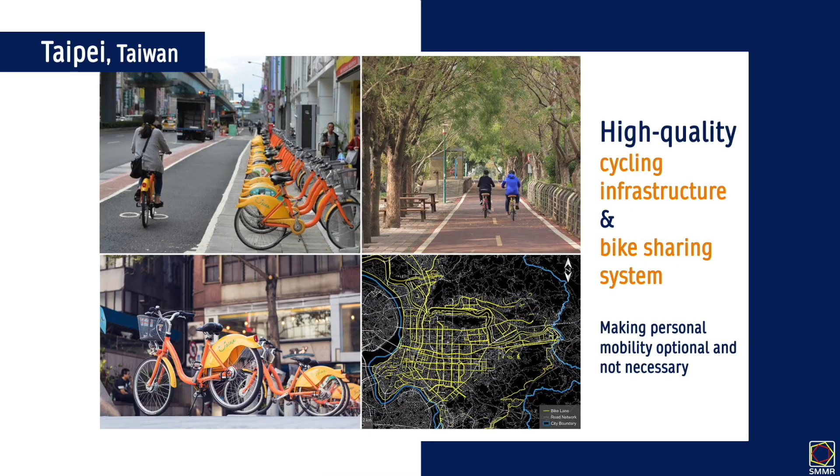So what they've done well is create sharing systems. They have a bicycle sharing system that's very extensive—outside every public transport station, you can rent a bike, and there are very good cycle paths everywhere in the city. But sometimes you want to do a longer trip than you may want on a bicycle in the tropical heat, and for that they also have an electric moped sharing system, which we have in Phnom Penh, inspired by Gogoro, the system in Taipei.

There's a lot we can learn from Taipei. They show us that you can have a lot of motorbikes, have public transport, and have a good walking environment. So I think we'll take a little break here.

Thank you. That was a long... a long first hour and 15 minutes.